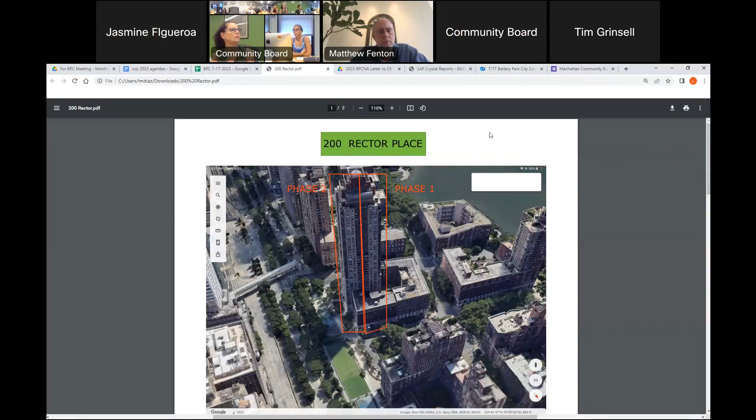Am I able to share my screen? Can you see our screen? We would, yes, if you could, yeah, MJ. Yes, please do, you can. Okay, one second, that would be helpful.

Can you see my screen? Yes, we can see it. People in the room, you have it. We all have that. It's hard to see in real life as on the screen, yes.

Go ahead, Jasmine. Okay, so this is the DOB approved site safety plan to date, which is basically the protection that's going to be around the building during construction. We have the sidewalk shed down the sidewalk, both on the north and south of the building. If you can see my cursor, that's all sidewalk shed that will remain during construction.

And I understand the part we're here to discuss is about the playground and the basketball court, tentative schedule, closing or not closing. So to date, right now, our site safety plan shows to surround the area with Jersey barriers and to keep the park closed during construction hours, usually between 9 to 4:30 or 5 o'clock, then open after work hours.

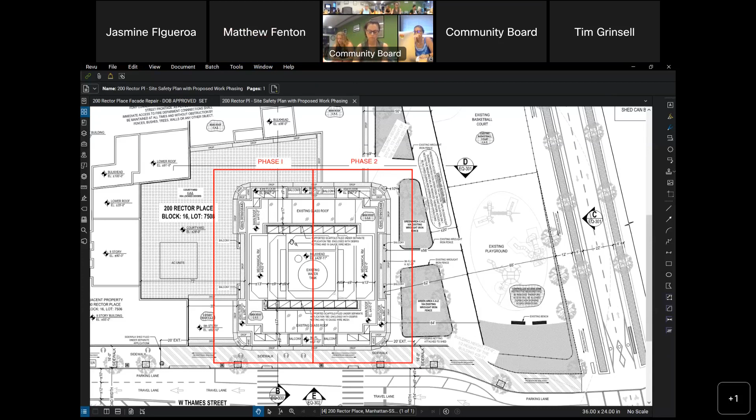Because usually when we have a scaffold, part of the scaffolding equipment extends across the building, and then technically we'd have to protect above the park. But the way we've managed the project is to have everything on the phase 1 side first. This would tentatively start early September. We would work here, and that would only require the sidewalk shed in the north and south to remain, without affecting the park and playground at that time.

This work here is estimated to be about 6 months worth of work. So if we start in September, the plan is to work as much during the winter as we can and finish it early spring next year, late spring, or early summer, depending on the weather.

During that time, we're trying to negotiate and talk to the DOB to see what they would allow us to reduce the protection over the playground as requested by the board. We wanted to see what the DOB would allow at the playground, because in past projects on the building, the playground was not closed back then — we only had sidewalk shedding on the greenery. Right now the DOB has been stricter about their regulations and protection. We've seen this throughout other projects, it's been happening all around, so we're still in conversations with the DOB to see what we can do.

Phase 2 would start early summer next year. Ideally, it wouldn't require us to close the playground and the basketball court. It might just require us to put a controlled access zone around the greenery and keep redirecting everybody through the bottom of the building, this side where we have overhead protection within the columns, and keep the playground open. That's the ideal situation we're still working on. But as is right now, the playground and basketball court would be closed during work hours and open after that.

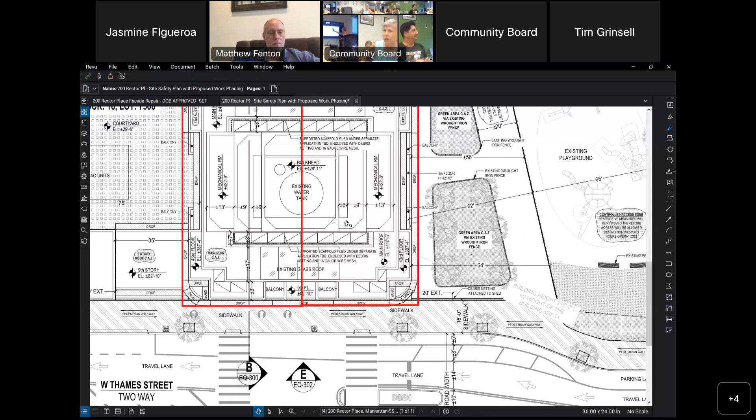Now the red has moved closer to the building, because that is the building now. So the red is just meant to show the building, not a periphery that's going to have anything built around the building. And everything over there is going to be allegedly not shedded, is that correct? This is not shedded, it's just closed, or is it partially shedded? None of this is going to be shedded, none of the park green area, none of this. This is just going to be closed off.

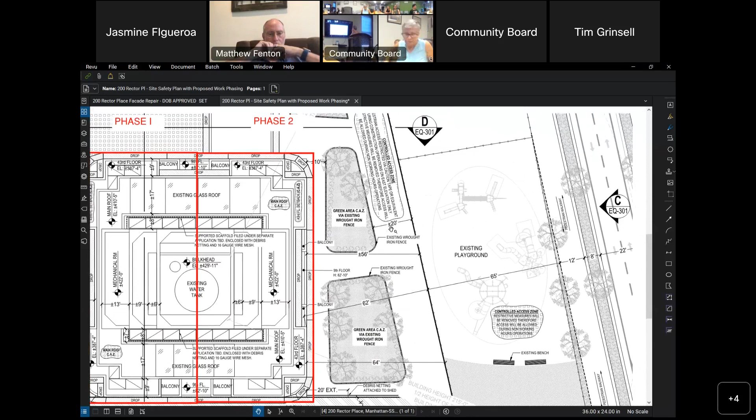Around the greenery, we're going to have some netting. Battery Park City will have access to it so they can water their trees and everything. All this is just simply going to be closed off. Nothing is going to be built large, just whatever is enough to hold some netting around it to close it off, but it will be 100% closed. During work, it's going to be underneath what I'm going to call the arcade that's already built in. Okay, so now that's what we understand to be.

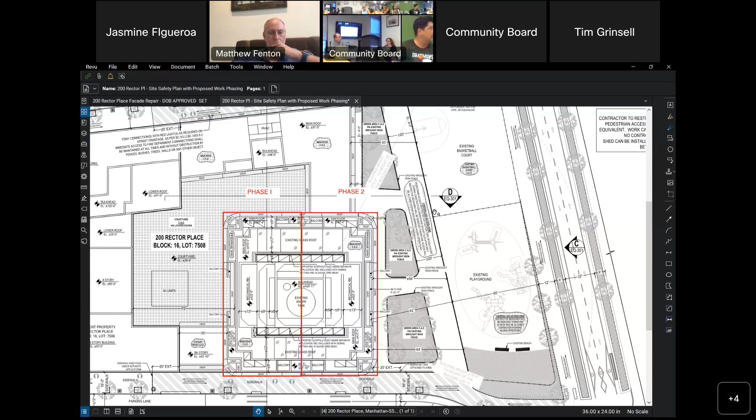Now let's get some plans from my committee as to the extent. Can I have one thing? It seems to me that we're going to want...

ADA accessibility on that route, and the only way to get it is to have some shedding along that route, irrespective of whether the park is open or closed. It seems to me that you would want to have some shedding so that you could pick up those ramps that take you up to Rector.

But you're going to need some shedding on the side of that building. Rector Park itself is a little elevated, just like the entrance to the building, whereas then you go down a bit to the West Thames area park. So everything is elevated, the steps all the way along there, there's steps and they're blocking the access.

So we don't have shedding, or I'm going to call it shedding, going over to our front door on the Rector Street, Rector Place side. It's not going to go any shedding. Here it is, it's all along here. This is the edge of your building. It'll be on the Rector Street side also, walkway, it's sidewalk.

It just needs to come out a little bit more to get it there. It almost looks like a pie shape, but it doesn't have to be that. There should be a way for people who are in a wheelchair, a stroller, or a scooter to go up and down, to pop out from underneath the arcade and get to a ramp.

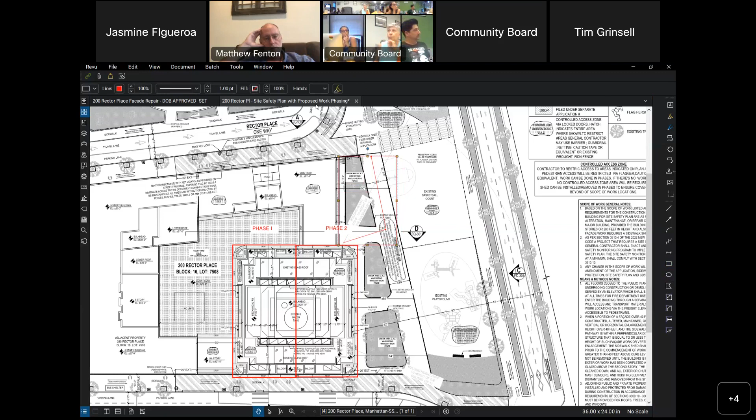In that case, we'd have to basically add a sidewalk shed to this area here. I wouldn't want to shed the whole area unless you were having to do it anyway, but if you could just add a little bit - is that possible?

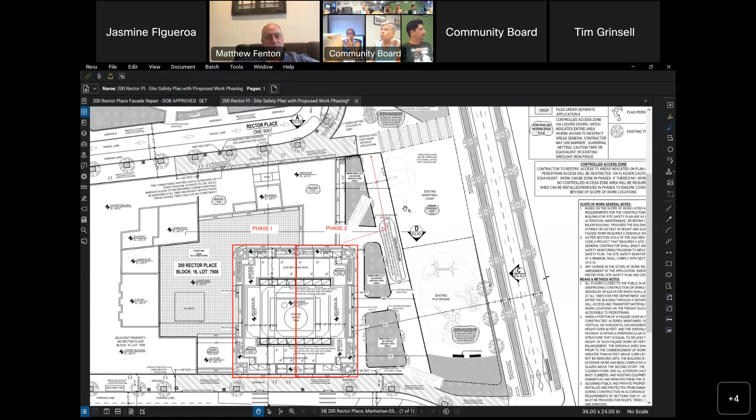Maybe the authority would like to help out with this. Yeah, right, they're not going to, because everybody else had to pay more - every other building has to. But it's $2 million almost already right now for this.

Do we expect, Jasmine, that all the roadways around there will stay open? So they want to hyper-protect the park area, but they're not worried about cars and deliveries coming in and out. The law doesn't require stopping that - it stops at the street. So basically, the law has always been the same for Local Law 11. It requires you to build out the shedding to the street, and that's it.

Then why is the Esplanade covered over so much? Because it's a walkway, in my opinion. And the Esplanade - I'm actually on that building - so we have the sidewalk shed coming up against the building where it's usually where people walk and that first set of benches.

And then we have the second set of benches with trees. And the area that is between that last set of trees and the edge of the water will have a controlled access zone, which is also netting that will be closed during work hours and open afterwards. We haven't started doing that yet because we're not working on that facade of the building just yet, but that is the plan - it's gonna be closed off with netting during work hours and then open after work hours.

And which building is this one? 380. This is 380? Yes.

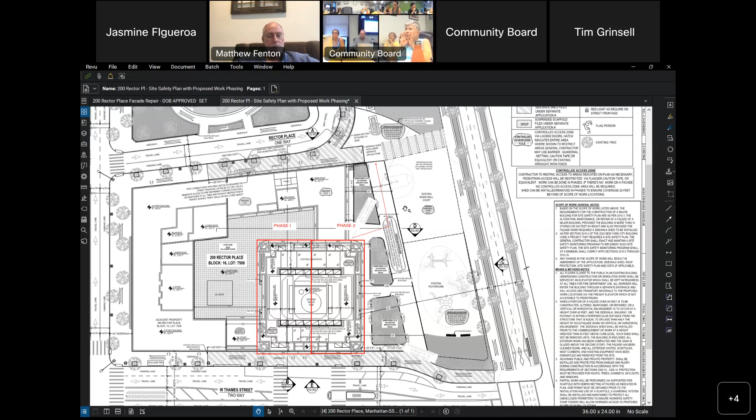Vince, do you have any information about that? He may not either, I don't know. Go ahead, speak up if you know about it. What's the question? Who are you asking? We're asking Nick Sbordone. Nick Sbordone, you see him there?

We can't hear you anymore, Ursula. She muted herself. Oh, no, I think it was okay, it was done. It was nothing very profound. Okay, thank you so much, we appreciate it.

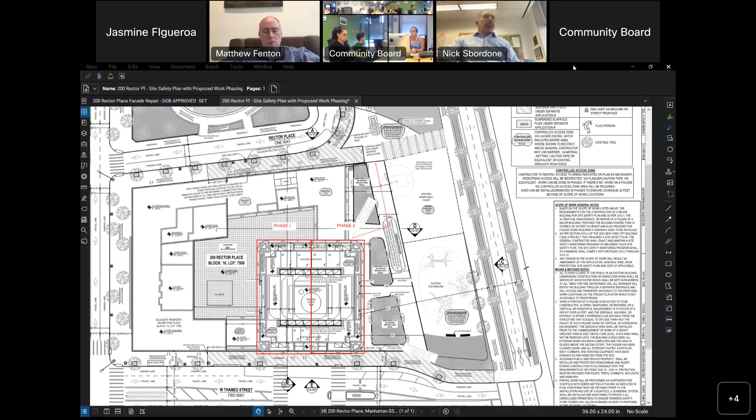All right, Jasmine, Matthew, Tim, who else? Anybody else who's here for this conversation? I appreciate your being here, I appreciate your input, thank you so much.

Justin, and Nick, can you hear me? This is Kiran, go ahead. Hello? Yes, I hear you speak. Okay, I just had a question. Does anybody know if 225 Rector is actually doing the Local Law 11 work? And if it is, when is it scheduled? Because they will too have the exact same problem.

They are in the same vicinity of the park and the basketball court, so if they were given a waiver, then we should basically follow the same procedure. Yeah, so I hear you and what Jonathan is saying, and I believe him because he pays attention to the level as a real estate agent that I don't. They did their scaffolding, no parks were closed, because they'd be adjacent to the full grown-up basketball courts and the community gardens, and nothing was closed. Exactly, they just had a shed around the building, that was it. Yeah, I think they may have had a shed along the walking path, that's it. But yeah, so that would be reasonable.

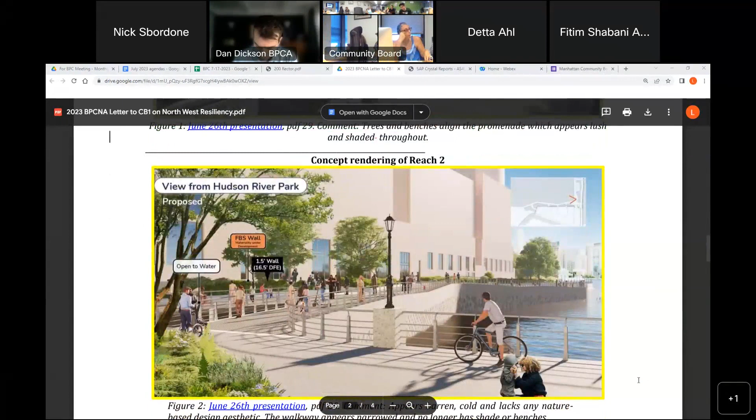So Nick and Tammy, I have a proposal for you, or Boris. I think it might make sense for the Environmental Protection Committee to go through and point out, in addition to whatever's listed on what the BPCNA gave us, outstanding questions and new questions, which I think would include what the Hudson River Park Advisory Committee/Trust has questioned about building out into the Hudson River, the effect of that, what's possible, what isn't. And then ask that you come with the engineers to the EPC committee next Monday, or at least in September, to discuss it before the 30%.

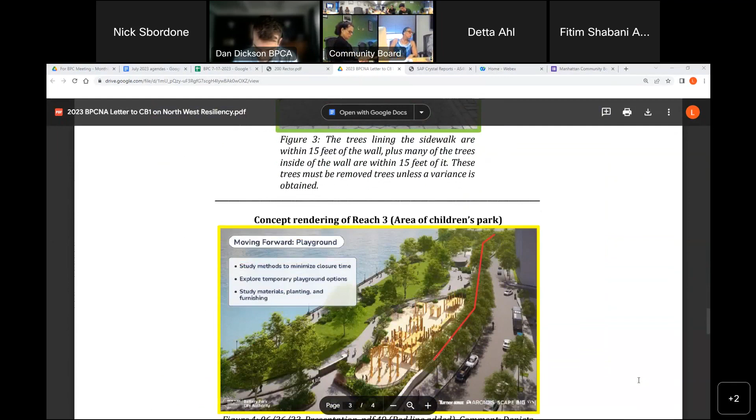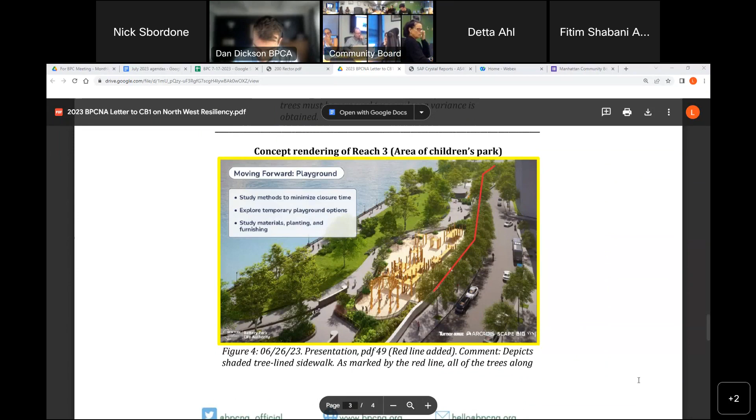Well, Nick, the concern that we have is you're saying that any feedback received after July 31st will not potentially be included in the 60% design, correct? Correct.

Can you hear me? Can anyone still hear me? I can't hear the community board though. Can you hear, just—I can't hear the guys. We're like the virtual gang, the virtual prison gang. Can you hear us now? Yes, can you hear us now? We can hear. We lost you there for a second, Justine and Tammy. So frustrating. Welcome to the Wi-Fi.

Nick, you stated that any feedback received beyond July 31st would not be included in the 60% design, correct? We can't guarantee that it will be included in the 60% design, yes.

And you're saying, what about the alternative alignment questions that were raised? The variances for the vegetative zone questions that have been raised? And then the design—when will those questions be answered?

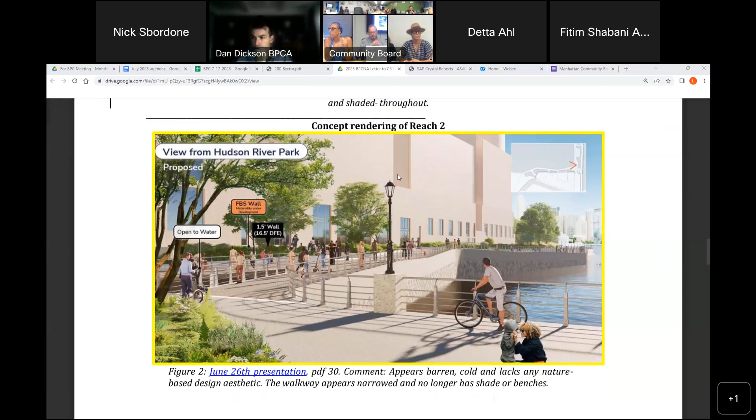Just if it's helpful to you all, because I want to make sure I'm capturing all this - I'm typing furiously, but we have the list of questions for sure. We have all the questions, but what we're working on now is the list of questions we got on June 26th, because as Jeff noted, there were multiple sessions and all the questions came in. We want to get those answered ASAP. If it's helpful, it's Monday night - I'd like to be back in touch with the board this week with the list of those questions, even as we're working through the answers, so you can marry that up with anything that may also be outstanding. Because it's helpful to be working from the same universe of questions, so we can either use what's already been answered or provide those answers if they haven't been. If that's helpful, I can work on that this week.

And if the REACH meetings were filmed, at the end, for the individual table presentations - those filmed portions are not on the website. Can they be put up?

So we didn't film the REACH specific meetings because the format didn't lend itself to doing 8-hour videos of each table. However, I will see what was recorded in terms of notes - I know we have some summary notes up there. I will see if there's any additional materials we have. Nick, if you remember, there was an ending session where each table, somebody stood up and gave a summary.

Jeff, I think I lost the audio for the committee again, but I am tracking that and I will see. Oh, there you go. Sorry, we lost you there for a second. Now we're back because I see my light, I'm lit up again. What Jeff was asking and Tammy was asking was pointing out at the end.

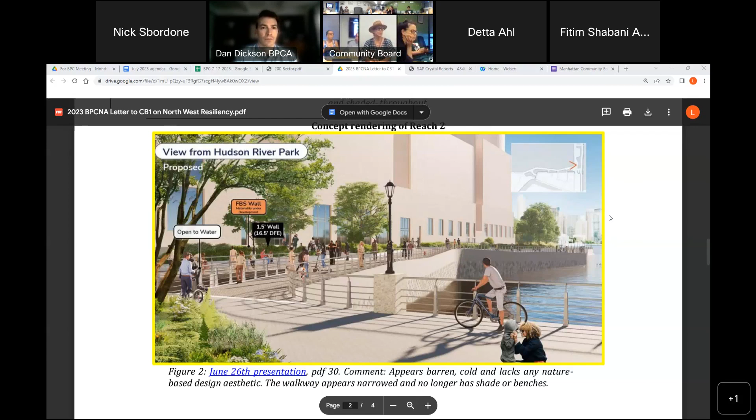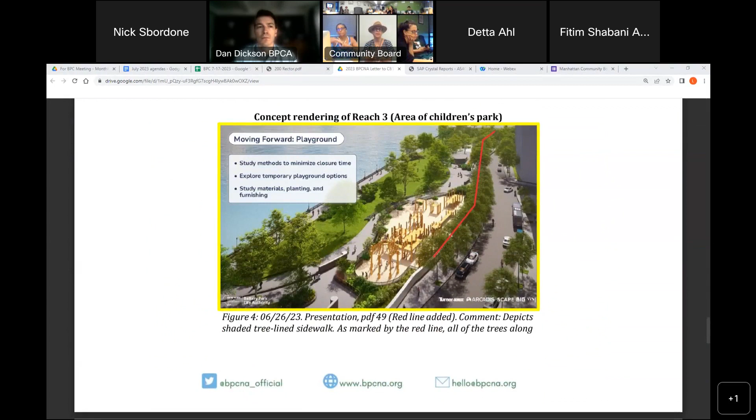Well, I think one of the benefits, as I've said many times, is that we are one of the first projects, and things like this are happening all over the world. We're dealing with something the rest of the world is dealing with, and we have engineers from all over the world working on this project. Some of the best minds are trying to figure this out with the community in a very tight, complicated area that we're all attached to and care a lot about. And as I've said many times, this is not just an engineering problem, it's also a big emotional change for all of us.

And I think there's an education component. It's a bit of a time capsule of sorts - if we record this and overkill the questions and answers and analyzing this, it will be a roadmap for the rest of the world to say, what problems was the public really fighting through and working through? Whether it's our city or another city or neighborhood, there are lessons learned that we're not going to understand right now because we're right in the thick of it. I'd caution us - I think people are going to write articles about this, historians are going to research it, and I think we should be making videos to educate people in our city about what's happening.

I've had this big picture thought on this whole project that I think we should be talking a lot more about - this is really the public square, and this is really history. So if it's okay to be a little overkill, I'd ask the people working on these things to think of it like the newspaper writing the first broad strokes of history, and then historians and environmental historians are going to look back and say, what did we learn? What kept coming up, or this type of thing.

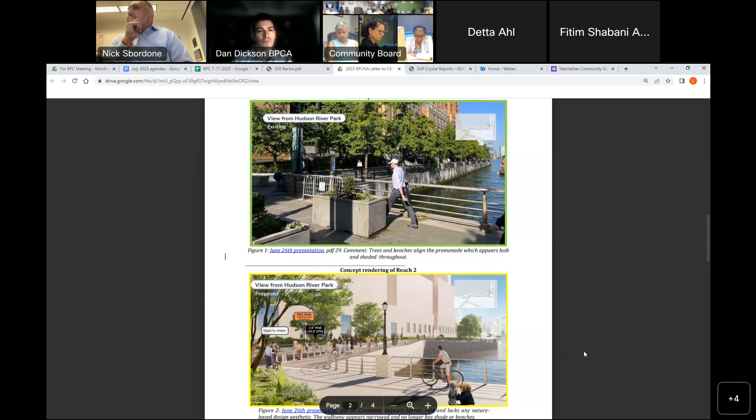Thanks, Brittany, for sharing this. And I want to thank the BPCNA for putting together this presentation and this letter, because it does summarize at least their questions in one place, and I think that's helpful.

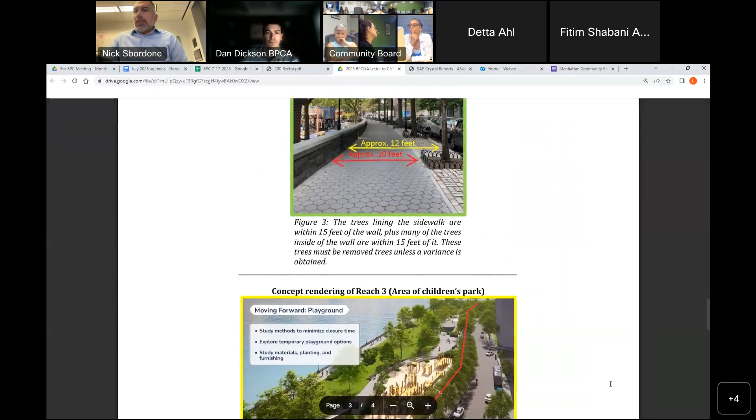So Nick, it would be great if you think something's been answered, that's fine, say so. If you think it hasn't been, keep in mind that no is a sentence, yes, but sometimes it's nicer and helpful to hear why it's no, when it's appropriate.

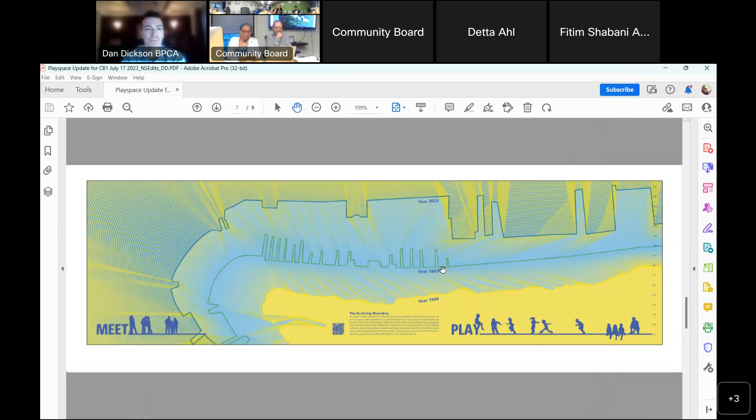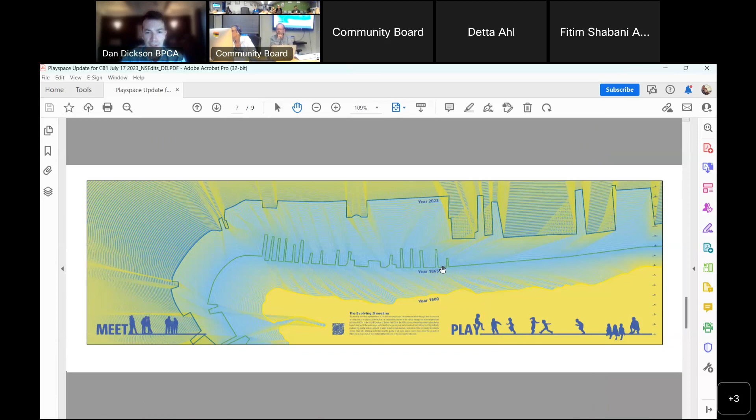These are just some graphics of literally what's been put out there as the vinyl prints. This is kind of a symbol of how the shoreline has evolved over time, an interesting graphic for people to read, as well as a little blurb describing that, and a QR code leading to Battery Park City's website, where you can learn more about the resiliency work, and it'll lead you elsewhere if you want to learn other things.

This is on the north side, a little bit shorter stretch. So potentially this could be for younger kids, and the larger stretch could be for older kids. These types of questions we're still kind of parsing out.

As Nick mentioned, there's a survey up currently, so we're interested in learning more, especially from those portions of the community that would use it most often - kids, people who are frequently walking along this stretch, etc. A couple other links are in this presentation as well, where people can learn more about it. I'd like to open it up to questions if there are any.

Tammy, the big hand. Oh, we'll do it. How about we get to Betty first? Betty first. Yeah, well, thanks.

I am very upset about the grass. As somebody who's a mobility scooter user, you don't put wheel devices, whether it's a wheelchair, mobility scooter, or a stroller, on grass, but it takes up so much of the walkway. You can see why I avoid this space, and that's not fair either. As head of the transportation committee, I've brought this up multiple times. This is the one option for walking space.

We also spoke in the past about no balls. If there's any activity with balls, they're completely fenced in, because we don't want stray balls or hockey pucks or anything else going to where the pedestrians are. They're already being compromised tremendously for the play of others. The children, especially older children, can go to Rockefeller, they can go to the ball field, they can play somewhere else. They do not need to be in this space at the cost to the pedestrians.

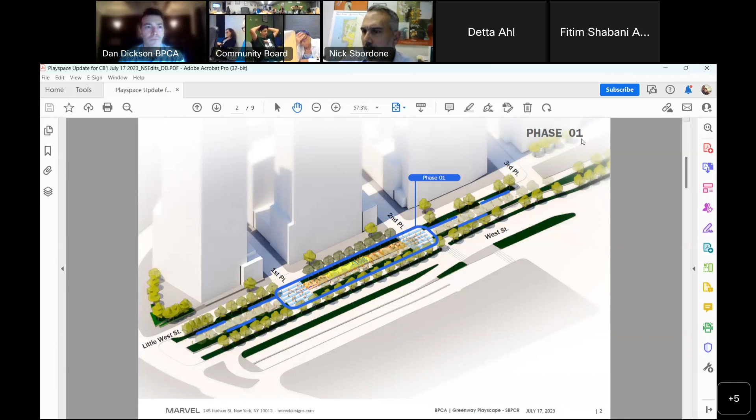Yeah, I want to confirm, but that's my understanding as well. We know how important open space is in Battery Park City, and to the extent there was an ability to activate some space that was used, but maybe not in the ways people were using spaces in Wagner, we wanted to do that. I don't believe the EAS was contingent upon it. I can confirm.

Thank you, Betty, you have your hand up, go ahead. I just want to get back to, I'm still not hearing anybody talking about really measuring use and like and dislike. How do you measure people who avoid a space because it's unpleasant? It's easy to say someone's playing, they must like it, but what about the people who avoid it? Agreeing with what Dennis said, there are times I use the bikeway, which I know they hate me doing, because the walkway is too congested and I can't make my way through, so everybody migrates over to the bikeway. So that's what's happening with some of these play spaces, unless you really monitor the maximal use of that space.

So I'm gonna follow up on what Betty said, Nick, and ask if you can do a pedestrian count to see what kind of active use there is. I'm especially curious starting almost immediately, obviously now, but also through when you start tearing up more of the sidewalk surrounding the battery, and how that impacts this space.